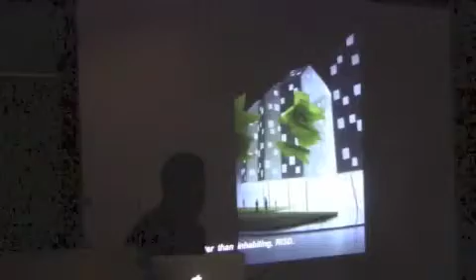I mean, coming here again, as Peter has told you, I was here 11 years ago, so it's an amazing feeling right now. What I feel is great being here.

This is a wonderful school, and you are the strength of the school and of this university.

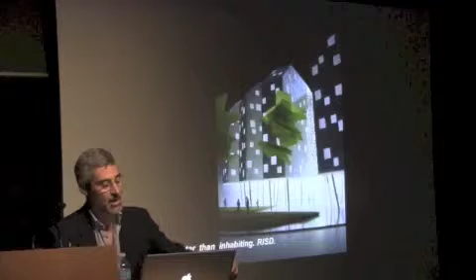So I am very pleased to meet you all here and try to speak and exchange ideas.

I don't know if I'm heard. Yes, can you hear me? Javier, you have to speak into the mic. Yeah, my ideas with you.

The title of this lecture, as you can read, is 'Living Better Than Inhabiting.' It depicts a feeling that I personally have about architecture.

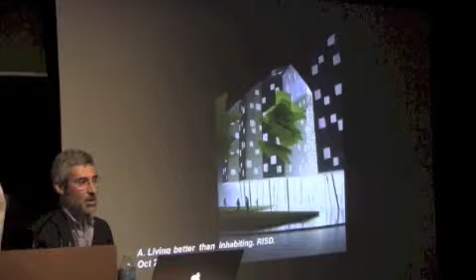I don't know if it is coming along with this shift Peter has talked to you about, in the way economic terms change how we as architects can approach our work.

But it's the idea that during so many large periods of my professional career, I've been dealing with the idea that architecture should provide a shelter, a content for habits.

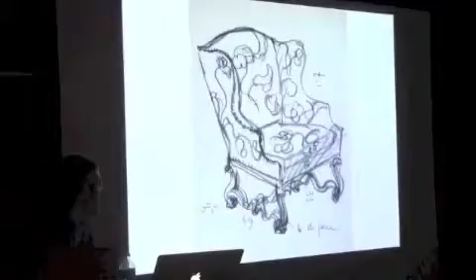Let me explain what a habit is. I picked up this drawing by Le Corbusier, which is not very well known.

It is, I've found it in the records, the archives of Harvard University.

And it's a very amazing drawing because it shows us an old piece of furniture, which for me depicts very well the...

...way our items, our devices, our furniture can fit very well with our necessities, which would constitute a habit.

Indeed, this word, habit, in its etymological sense probably comes from the Latin verb habere, just to have.

So habitar, habit, inhabit, inhabiting, is the same thing as to own.

So I own things. I own, you all own items and devices that make your life...

...easier and fit very well with the way you perform in your particular individual and collective lives. This was my thought.

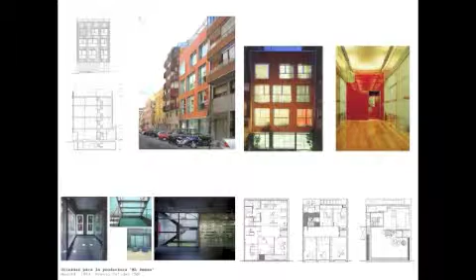So, just to give you some hints about my work during this lunch lecture. This is an old project, from before 2000. It's a very small building which uses this idea of different scales. It depicts this effort in a very clear way. For instance, if you count the stories of the neighboring buildings, you get 6. Then you have 3 — the building here is a 3-story building, which is not real; inside the building you actually have 6. What's interesting is that the scale of the street is changing out of this effort of putting a different scale, a different size of things.

I've been drawing for a long time different projects made by many different architects, just trying to understand how architecture can be placed on the site, how you can find the site, how you can materialize it, how you can shape it. These three things are very important.

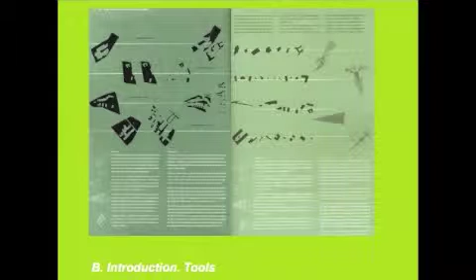So these exercises are not regular work for an architect, because you are not projecting a building, but trying to understand how other architects have been working on architecture. This is very important work. I've been developing all these drawings over a bunch of years, and they have always been a great asset for me, just trying to give me a better understanding of architecture.

So here there are in a row 3 projects which are different scale. This is not a very big piece, it's a very simple building, it's a nice room. It's built up very close to Madrid, in nowhere. It's a city, a place, you have some freeways there, and it's not qualified by the site.

So what I was trying here is to understand that the building would have to reflect, would have to appear as a very simple piece, not a very complex shaped form.

And then with this drawing, which allows us to construct the roof as a wall and then round the edges and cover all the building with a white stained metal sheet, it could allow us to understand it like a refrigerator that were laying down on the soil, on the ground, and was a little bit abandoned. And you could see this big piece of architecture from the freeway, the highway, when you were driving.

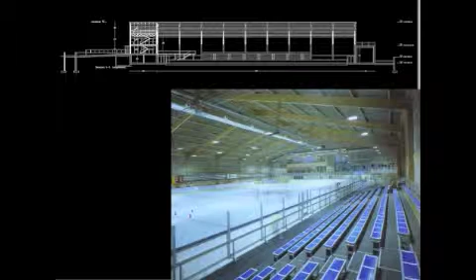The first time we met Cecil Balmond, which was not so well known by that moment. I think he hadn't worked with Rem Koolhaas at that time, and even with Toyo Ito, then he became very, very famous after that. But we were working with him doing this project.

And we developed an idea for... yeah, well, this is from last time, so it's nice to see this. It's a good shot.

Well, we were just trying to figure out how you can join a hard piece like the tuna and the wasabi, and then a flexible layer like the rice and the seaweed, nori. And this becomes like a total and compact form, even though you are mixing two different concepts, rigid and compact and dense, and flexible, which would allow making this very strong piece, something you can bite without losing your teeth. That's the idea.

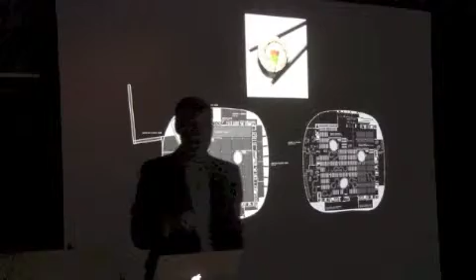Then it's very interesting to understand that all the strength of the hard part, which would be in this case the libraries, the books and the stacks, and all the core of the building, can be diminished by the idea of flexible movement of the outer skin. What's interesting is that the contact between these two parts of the building was through springs, and also with the foundation. So the building can move in this way or that way, horizontal and also vertical.

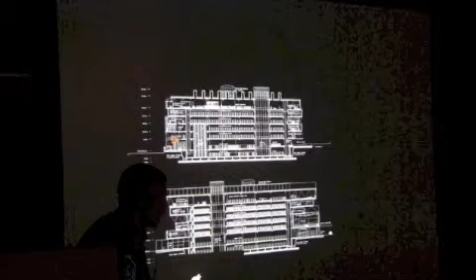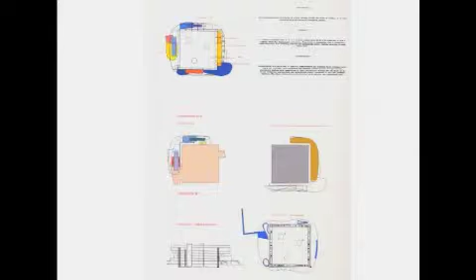So it was a very, very interesting idea, and we developed this with Bayard. Well, these are some of the drawings we were using about how the program could be associated more with the rigid or with the flexible part, and how, with very, very simple schemes, we could provide all the technical requirements. This is another one.

I have to say that most of these projects have been the result of international competitions, as you have seen, and many of them have obtained prizes through all these competitions during the last 15 years. So this is a very important thing.

The career you can make with architecture is not going to come out of one building, but it's going to be a path that you have to walk. So it's very important to understand that you have to make efforts to achieve experience at every step. Your life as an architect is going to be a collection of steps. Some will be more valuable than others, but all of the steps are important for understanding the way you've been related to architecture.

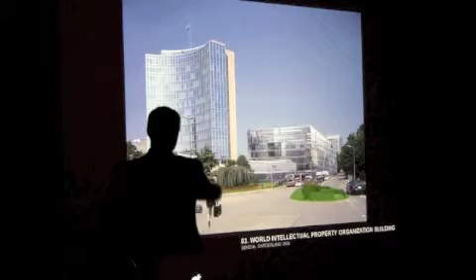This was a huge building in Geneva, Switzerland, for WIPO, the World Intellectual Property Organization. It's a very wealthy, private society. They wanted to build a huge office building with a headquarters. They had this previous one which was built, and they wanted an extension of the building.

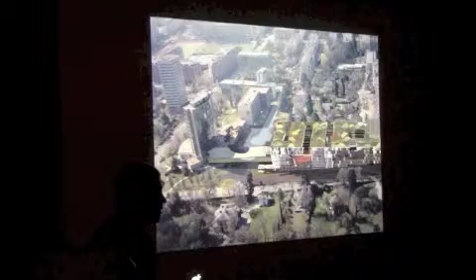The thing is that the insertion of this extension was breaking a very nice system of a garden city. As you can see, it's like here: you have this narrow field with little houses, trees, streets and paths, and then the side was breaking it, making a border, making a line in this way.

I've chosen this image to show you how the building can concentrate and contain density, and at the same time provide a void that allows exchange between both sides of the garden city. You can see through this ideogram above these two ideas: the sponge and porosity, a flexible field of the sky with clouds, and then the density of the city inside of it.

Both things don't fit well together, but you manage to enlarge certain systems to provide public facilities with a huge amount of space, which puts you a little bit like in a bridge, in the sense of bringing connection through the gap.

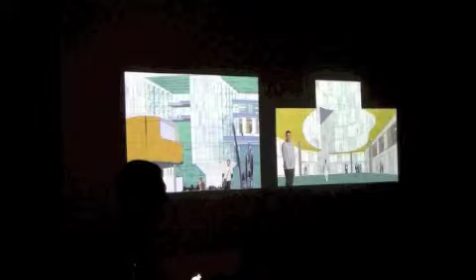Yesterday we were talking about the way of performing these drawings. For me, this is like a way of drawing from the other century. But it's nice to see them right now. We were cutting out figures from magazines and then placing them on the drawings we made with pencils and watercolors. It's very nice to see them right now. They're a little bit naive, but they're nice.

Well, my next point. I have to hurry a little bit. You do.

What is an ecology? Ecology is a sustainable way of construction, that's it. How can you produce ecology? You have to save energy, improve the natural conditions of the site—I'm going to spend time on this part of the project—and you have to be modest. Try to learn and understand the site's possibilities and conditions. This is very important: you have to be modest, you have to hear what is coming out of the site.

We won this competition, but unfortunately we haven't built it this way because the university was very, very afraid of what we were proposing. So you are going to see right now what happened.

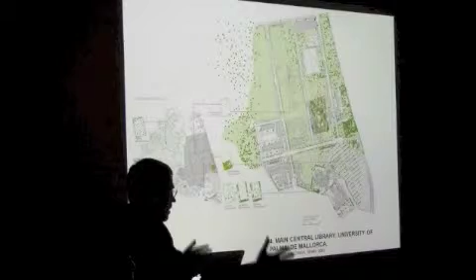The normal way of constructing a building, whichever way you go about it, is that you destroy the site a little bit. You make an excavation, you flatten the land, then you make the grounding and the basement, and then you construct whatever—a collection of infrastructure that ends up colonizing the site.

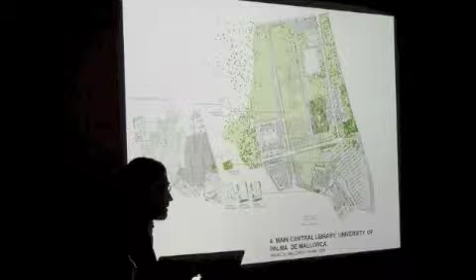Well, you never take into account that on that soil and under the soil there are so many things happening. There are soft things, there's water, sometimes there's water. When you build architecture, you damage, in a certain sense, we can say that.

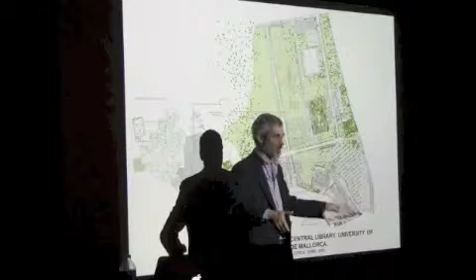You make an injury to the natural conditions of the site, even though the site is an urban site. So what we try here is to improve the natural conditions of the site. Our building was this one. These buildings are constructed just injuring the site, saying architecture is here and it's going to be here for a long time. We were trying to understand the meaning of the site, the streams of water and the trees that existed by the time we were designing this.

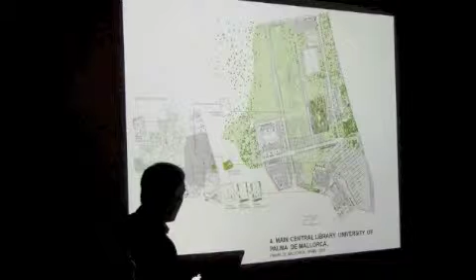So this is dealing with ecology. The idea is to understand that we could not flatten the place, avoiding all the underneath conditions we had there, and understanding that the trees wouldn't be cut. We didn't want to cut any tree there, so we wanted to improve them, to improve the number of trees.

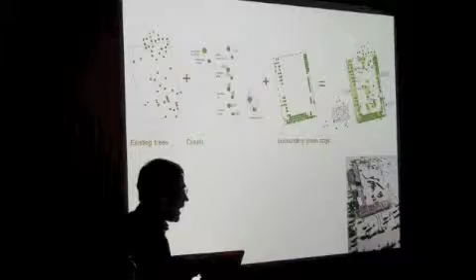So we became interested in this idea of reading under the tree shadow. For preserving the trees, we had to project and build a core for each tree. We took measurements of all the streets and the trees, and then we gave form to all of these little cores, digging out material to give air and to allow the presence of the trees.

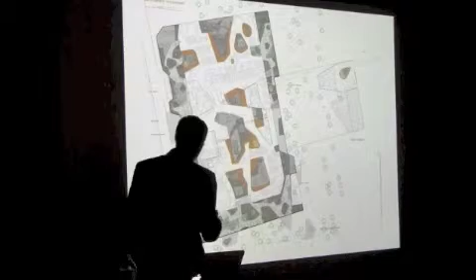At the same time, we proposed a buffer zone, a very wide buffer zone, included inside the library as a threshold between the external part, the street, and the inner part of the building. This is interesting because it's not only a decorative way of doing this. You, as a user of the library or people outside, would be allowed to use that to work. You have natural ground treated, but you would also have the possibility of plugging in your computer. So this is like a very funny mix of different ecologies, natural and artificial.

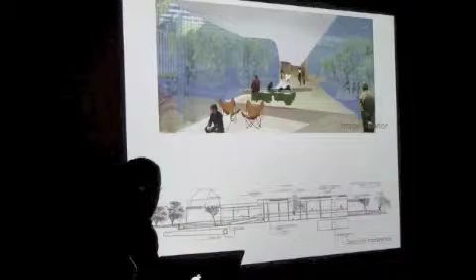So these are inner parts of the building, and this is the buffer zone area. This is an image I like. It's very poppy, a very popular image, but I like it because it has the strength of showing how you can use space within its natural conditions without the necessity of making a floor with an artificial slab.

So the provost of the university became very worried about using all that huge amount of money in this way. He told us, I'm thinking about this, I have to consult my team, we have to discuss this with the community, and we will phone you. So we are still waiting for that phone call. Every day when I get up, I think I'm going to receive that call. I am on the expectation of receiving that call. Well, the case is that by this moment, nobody has phoned. So let's see what's happening in the next years.

But this idea was partially developed through this building. We had the chance of winning a competition for a market building. It was very interesting because we could work with some of the things we had learned from the library and put them into, probably, a more modest scale, but in a very nice way. For us, it was about trying to understand how we could use the building as partially open, partially closed, and how a very emotional and cultural activity like the market can be used for the community. So the idea is to make a plaza.

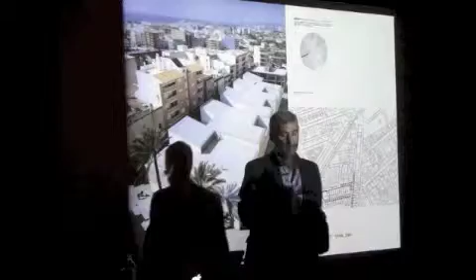So we could give this piece an indulgence through our effort of building something with it. The power of this piece is that it is not manufactured, so it's absolutely irregular. It's not fitting well, which gives a sense of mobility and lack of transformation through manufacture. It's interesting because you are using the material as a mineral, as a raw thing—a very close approach to nature, using materials not as rocks, but as minerals.

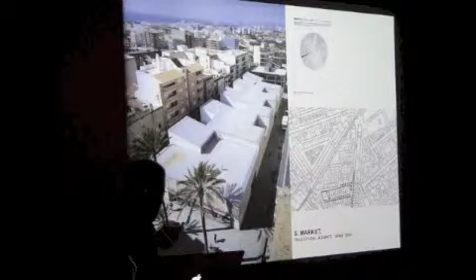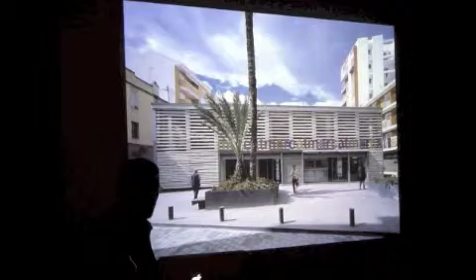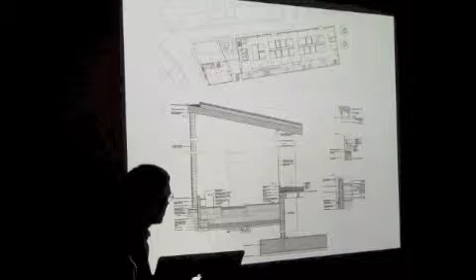One important thing is that both buildings don't need air conditioning. At the very first step, they didn't trust us, even the engineers working on it. They thought it wasn't going to work because you needed particular conditions for storing all that fish or meat or whatever. We were very sure about what we were doing, and at the end the building was approved and is working without any air conditioning waste. It's very interesting—just the circulation of air and the different conditions in the environment allow this.

I like these pictures because we could be somewhere, but in a different mood than a building. It's a little bit rough, but I like the connection with the materiality of things. And I like also this world of shadows and lights, which allows the sense of light and life as well.

This is an inner street—a buffer zone, like in the library, used by many people who don't want to go to the market. It's a very sheltered and comfortable space. These are our orange trees, now quite big, and it's a very nice place to be.

Is there glazing there, or is it just open to the air? It's open to the air, but you have two different architectures: the shelter, which is open to the air, and then a glazing fence just 3 meters high, with some screens of nylon that can be unfolded by different devices connected to the conditions of temperature and humidity. So the building is self-sufficient in the sense that it's changing the enclosure just to shift to the conditions in the city.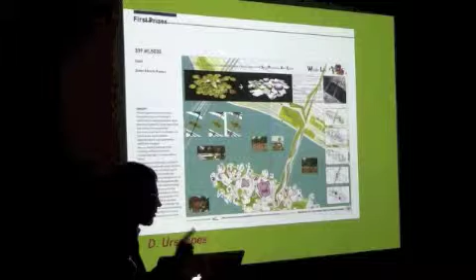These are 'Urscapes,' which is an invented word mixing 'Ur'—as you know, Ur is the oldest city we have, the source for urbanism—with 'scape,' associated with landscape. So if we mix scape with Ur, we get this mixture, part of the idea of infrastructure that is needed in the city, but at the same time escaping from that idea.

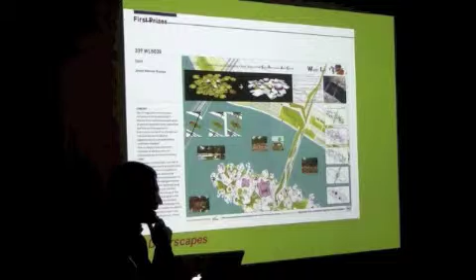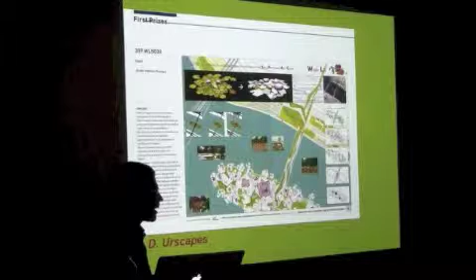This is a project for Seoul, Korea. I don't know if there is somebody here from Seoul. I think it's built right now. We won one of the first prizes. It was quite a big discussion on this, but at the end we didn't have the chance of dealing with this project. They decided to hold another round of the competition results, so they hired Jean Nouvel, and I don't know what's the final outcome.

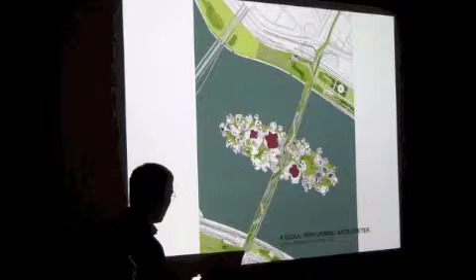The idea is to transform an artificial island, which was laid out here, used as an infrastructure for storage, and then transform it into a sort of molded, not flat, but molded landscape, partly covered with cultural uses. The interesting thing here is that architecture is soft—so the auditoriums and the theaters change shape.

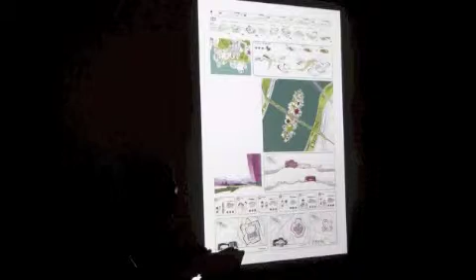They are pneumatic architecture, and they can be inflated with more or less air, just to have a different volume and form. It depends on the activity, the people attending, and the conditions, even the weather conditions. So I think it's a good approach in the sense that architecture doesn't have to perform as a very steady agent in all the play of different things going on, the construction of the place, urban space.

Well, this is a project we are developing right now. It's a very difficult project. It has a lot of difficulties to be developed. We have been working, almost, I've written there 2007, but it's not true. We've been working here for 10 years. And I don't know if we are going to arrive to a good point, it's so complex.

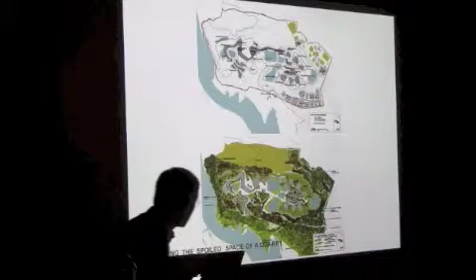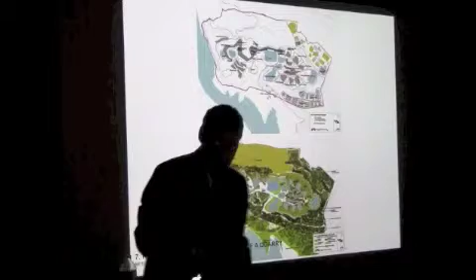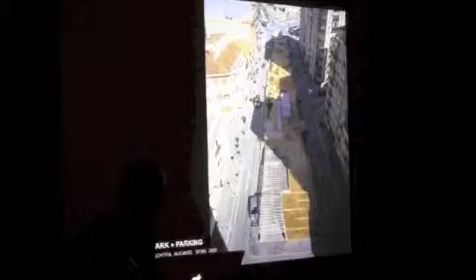Yeah, a little bit complex to understand, but architecture won't be appreciated as a building, but as part of the landscape and as a continuity of the mountain. Just to figure out the meaning of this, we have cliffs here of 40 meters. It's not very... I mean, it's double the height of this building. It's quite big, a huge extension. This was built, and I'm going to run, Peter, really fast, okay? Just to arrive to a very nice slide I have at the end of the lecture. This is my point. All this effort is to arrive to that point, okay?

So this is a very simple project that was constructed some years ago. What we try to make here, in effort, is you have a flat sheet, and then you press the sheet, it is deformed. This is very interesting, because if you deform it, you fold this plane, and you get the chance of having air inside. So you will have to mix.

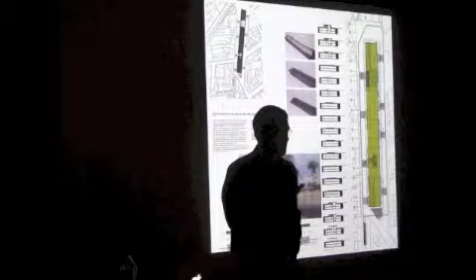This is a common project in Europe. Cities are making these parking lots that are dug underneath, and then they cover it with a garden, which is something impossible, absolutely impossible, because the heat produced by cars damages the possibilities of the trees growing. The roots become, with the temperature, they don't have the natural conditions for growing up.

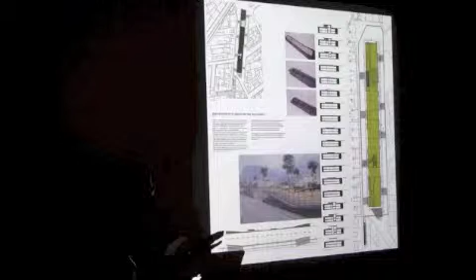So what we did is open this, lifting the ground, just to allow the air to pass through. As you know, the CO2 from cars is heavier than the air, so the CO2 would go to the floor, and it would be removed out of the parking lot with mechanical devices. But the chance of removing the heat, the air, under the slab, the floor, is cooling all this concrete slab, and it allows the trees to grow up.

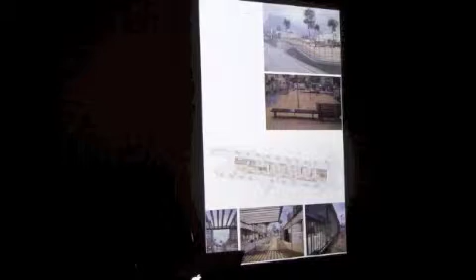So it's a nice effort, because it's giving the chance for these trees, all pictures that are quite big, and it's very nice. This tree is called jacaranda, I don't know the name in English. It has a purple leaf. It's beautiful, very Mediterranean. I don't know if you have it here.

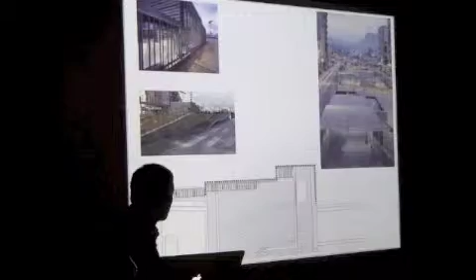Well, I'm going to pass this. I don't want it. I'm going to use this to say something, because I cannot help passing without saying it. This.

Institutions, objects, system, institutions. This is a very important thing. An institution is not only a type of architecture that can be used for containing some uses, official uses. It's also a symbolic piece, because, as you know, we express ourselves as society, as community, through our institutions. So it's very important the way institutions and the buildings of institutions perform, giving us a hint of how we can use them. The most amazing thing is to project an institution. It's an amazing thing, because it's a collective form, a cultural form, an ecological form.

And it expresses all the things we expect out of our past, our traditions, but also of our future. They are very important. This is a competition we won, competing with 5 other teams, and we passed through the second step.

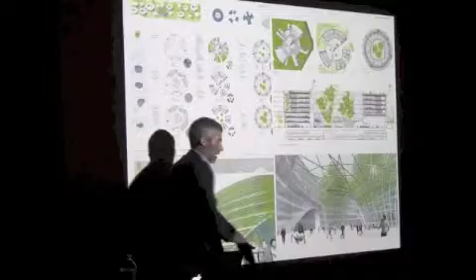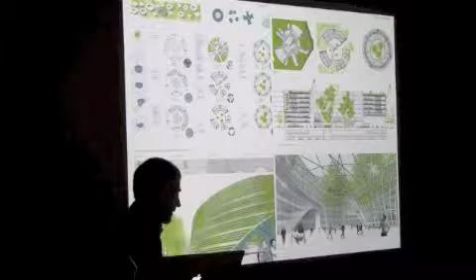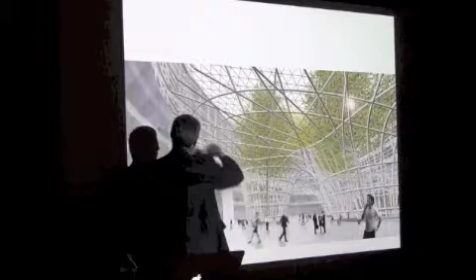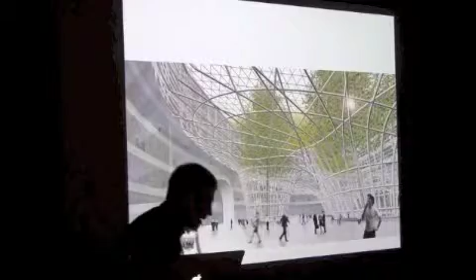Giving public meaning. So there were some trees there, and the trees related to this structure that is coming out of the branches, like a very sophisticated, tridimensional thing, made out of pipes, like different moving pipes. And it's conforming all this facade of the building. So this contact that is produced, that emerges out of the trees, is irradiating all these conditions to the building.

Well, I'm just going to pass all this. This is a building, we are just picturing you the ideas. Just 3 minutes now. This is a museum we are constructing right now.

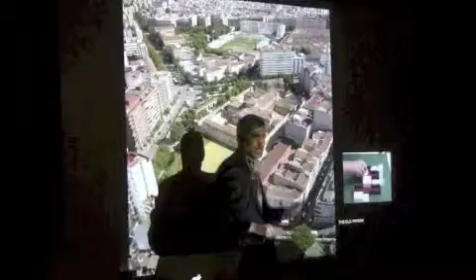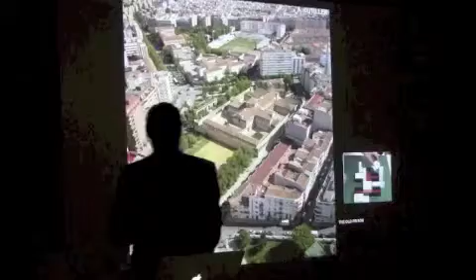We are building it. It was a very sad place. The prison is the saddest place you can imagine. We call it in Spanish a pain place, it's penal, a place where you feel miserable. You cannot be well even if you are walking. I don't know if you have tried to walk nearby the wall of the prison—it's a very bad sense, just thinking of it.

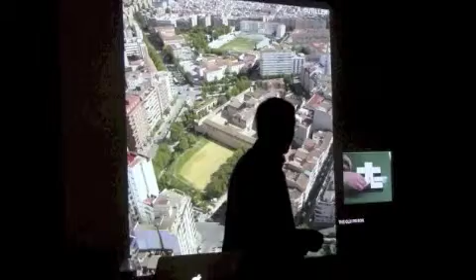So when we were proposing and we won this competition, I think it was for this idea, that the symbolic effort of taking the air of the prison and putting the air outside is giving freedom to this space. So it's a very symbolic effort, but the museum won't be constructed in the prison, but outside the prison.

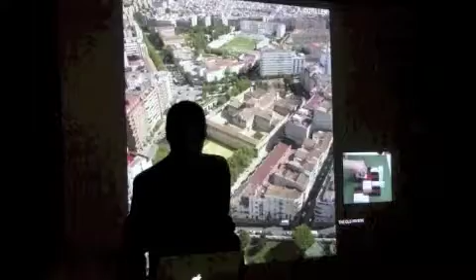Through these buildings that were pavilions, that were like lamps out of the building. And the space of the pain, sad space, will be transformed into a freedom space, a public space for the community.

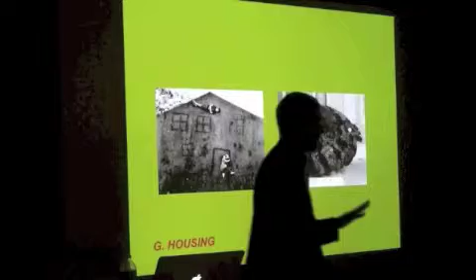These are some of the images, and this is one of the pavilions. It's a huge building, so I won't go through this, just show you some images. I'm going to pass this, and we are arriving at the final, entailing all the lecture with this final. But these are beautiful images, although they are not very good ones, because the quality is not very good, but they are fantastic. You know what is this?

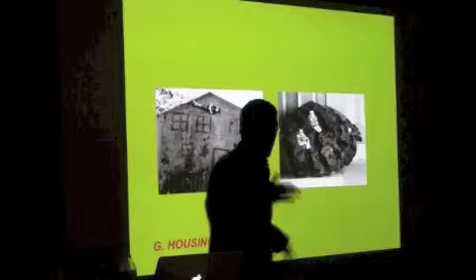This is a shadow of the house, and the children have drawn in the shadow the house. They have made their own house. So we are taking a nap here in their house. It's beautiful.

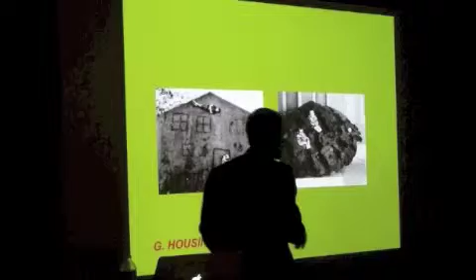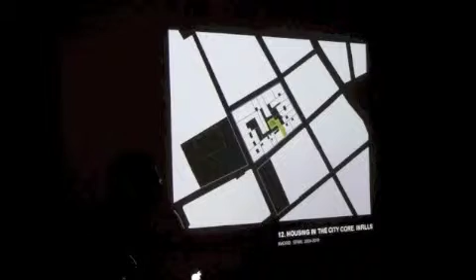And the other image, this is a meteorite, a big meteorite, and they are very serious, but they are living in the meteorite, no, they have colonized the material. This is beautiful, and it expresses well this idea of the emotion of projecting housing. It's a beautiful thing, it's an amazing thing. It's a celebration of life, always a celebration of life to build a house.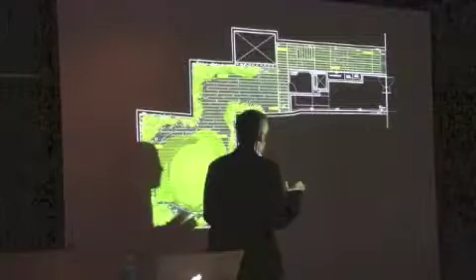Well, 3 projects, I'm going to go very, very fast through them. The first one is an infill in the center of Madrid, a very dense area with lots of immigrants. And the effort of this project was to make a close relationship through a path between the street, which is here, and a tree that was here in the back. So trying to use the architecture as a device that could allow us to reach this tree.

And the nice thing of this, is that it was so narrow that the stair was in the middle of it. So the stair is part of this plate, and the stair becomes a public item for the citizens, which will be able to pass through it and go to the top part of the building.

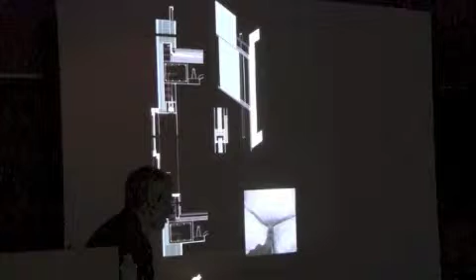The other thing is that in the inner court, or very, very small courts, there is not enough light. So we try to construct a lamp inside that will reflect the natural light through this system of glaze and insulated silver aluminum, which would reflect the light into the tree space.

You see how narrow and small it is. This is the external facade, which is made of stone. They're very large pieces of stone, 3 meters high and 6 centimeters thick. One piece is not concrete or whatever, it's stone. And it's the maximum length this stone would bear all the conditions not to be broken. It's a condition of equilibrium. It's a beautiful one, because if you diminish it just half a centimeter more, then it can be broken.

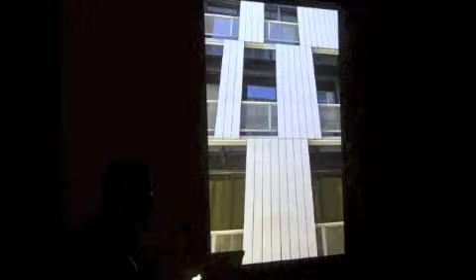So this idea of cantilever to the street is in a position of equilibrium. This is the stair, and this is the court.

This is another building we have finished, and I'm going to stop into this. This is a piece of aluminum, extruded aluminum. We have patented it, and it's an interesting piece because it's like something you can handle, very light. It reflects the light, the heat, and at the same time it breaks the sound, the noise of the trains, because this is constructed very close to them.

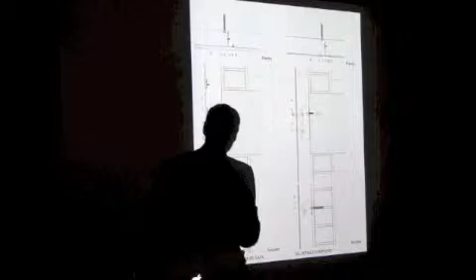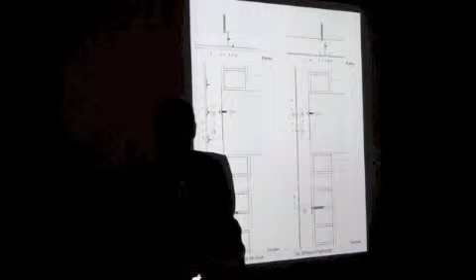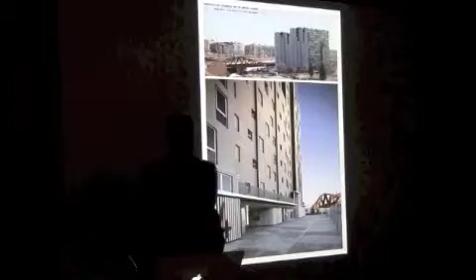So this wall, I mean, this is a very, very low budget building. We had to make it possible to live there. So this is an important detail, and the development of this piece has been very important for the success of the building. So here you have this building layered with all this. You can appreciate here all these pieces.

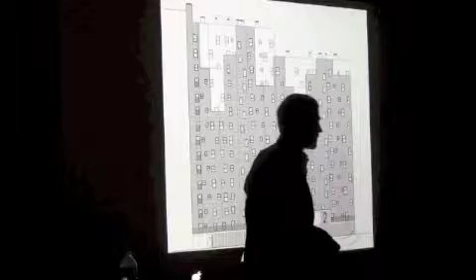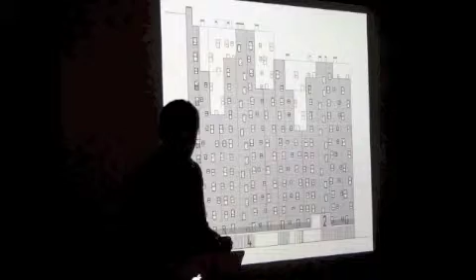And then there is another situation, this movement of the windows. You can think that it's decorative. It is not. The fire regulation wouldn't allow us to make so many windows in this way. We have to cover circles, breaking the continuity of the flames. So they are drawn out of these patterns, this geometry protecting the building from the extension of the fire.

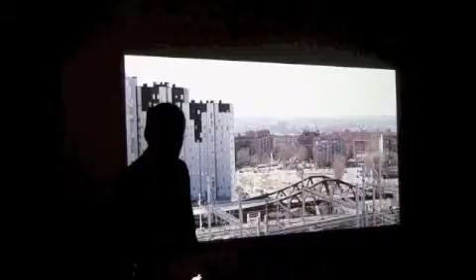Here you can see this idea of logs constructed in the basement. This is the picture you have seen, and these are the trains, bus trains. This is public housing, for people that don't have income. The site is very nice, but it had very difficult things to be solved for building housing here.

So the other important thing is, we were discussing this the other day, the ground. The ground is very important because it's the public space. We all share the ground, so it's very important the way you use it.

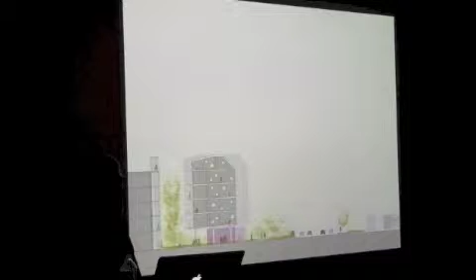This is the final one that will allow us to arrive at this final slide that I like so much. This is a very, very small building that is divided into four, because we wanted all the dwellings in this housing to have the possibility of external air. Now there are no inner parts in the building. So the massive corner is transformed into a sort of rupture shape, broken shape, which allows the extension of the facade and the contact with the street.

I like to think that it's also, how do you say, piano keys. It has this idea of moving your fingers through it, and even your eyes. And in the inner part, which is very small, the idea is to construct space with a certain sense of joyful space, like movement. The idea of movement and life.

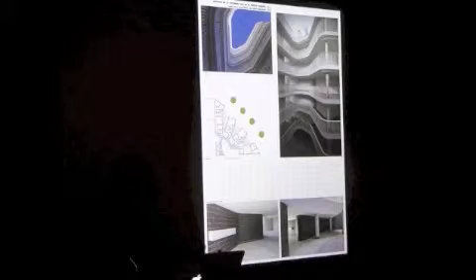So this was the old court. It was very small, and this existing building was cut here with the wall. And then we opened this space with our building, just to broaden all this courtyard and bring the air in. The handrail is a play of moving all these bars in order to make this kinetic movement of the perception.